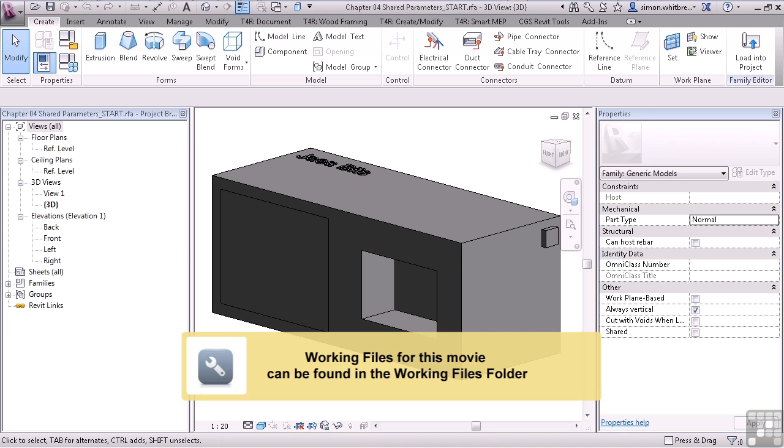Video 0402 Shared Parameters. From your Chapter 4 folder, open up the file Chapter 4 Shared Parameters Start. The first thing that you need to know about shared parameters is that they are stored in a text file. Generally, some sort of manager will have set this up for you, unless you're the manager, of course. Autodesk made a good start with their shared parameter file that's distributed on Seek. And there are also the other standards like ANZRS.

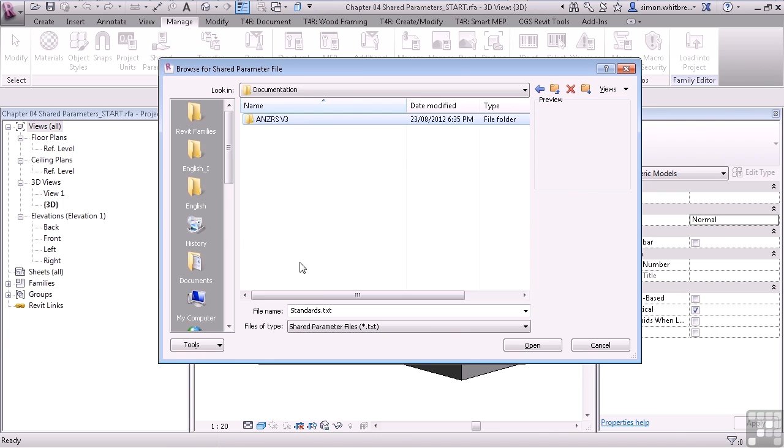To set up or just set your shared parameter file, go to the Manage tab and click on Shared Parameters. Here, if the shared parameter file has not yet been set, you can browse and find your shared parameter file. Here under the Documentation folder, I've included the ANZRS version 3 shared parameters, and I'm going to select the MEP version. In this file you can see that we've got some parameter groups, so I could select mechanical equipment and find some standard shared parameter names.

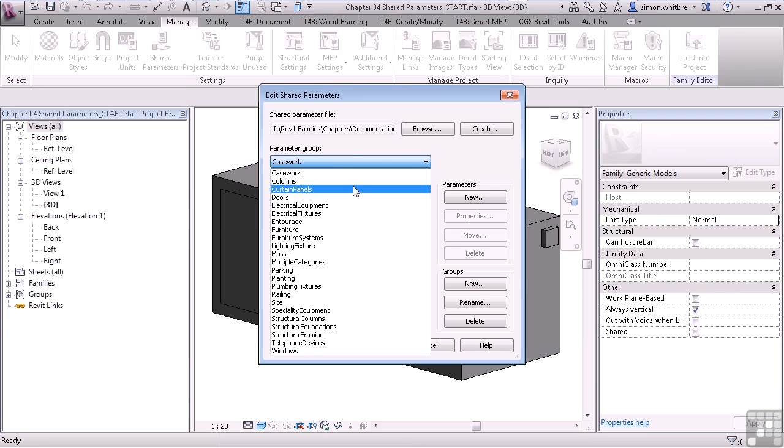I don't have to use this shared parameter file all the time. I can swap them, so if I'm creating an architectural family, I can browse and open up another shared parameter file. Here we've got parameter groups for casework, columns, curtain panels, doors, etc. Let's actually take a look at one of these shared parameter files. You can see the file extension is a TXT file, so we should be able to open this in Notepad. And here's the shared parameter file itself.

There are a few comments at the top. This is a Revit shared parameter file. Well, we know that. The next line is important though. Do not edit manually. If you're tempted to come in here and change names to suit the way you want the name to appear, then it's slapping time. You must not edit this manually. If you want a parameter with another name, then you need to go and create it. There are Revit add-ins, however, that will allow you to do these changes, but they're add-ins that you do have to pay for.

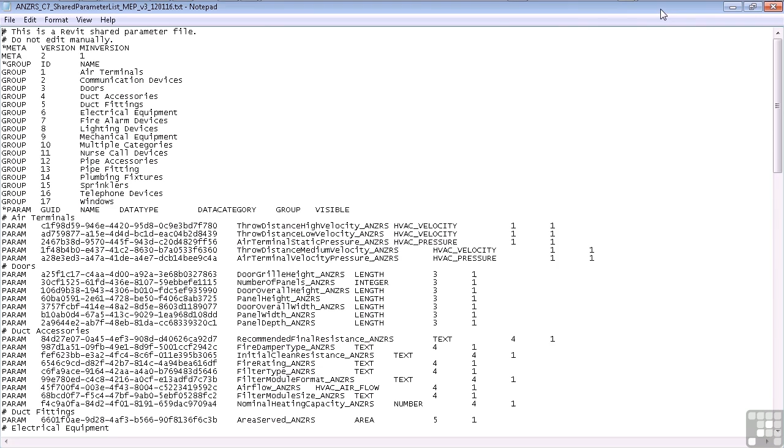As a point of interest, here we have the groups which we can see in the Revit file. Let's put them side by side. I've got a group called Air Terminals, Communication Devices, Doors, etc. So this is the MEP shared parameter file. And under the groups, we have the different parameters. First off, we have this thing called a GUID. This is a unique identifier that Revit generates itself.

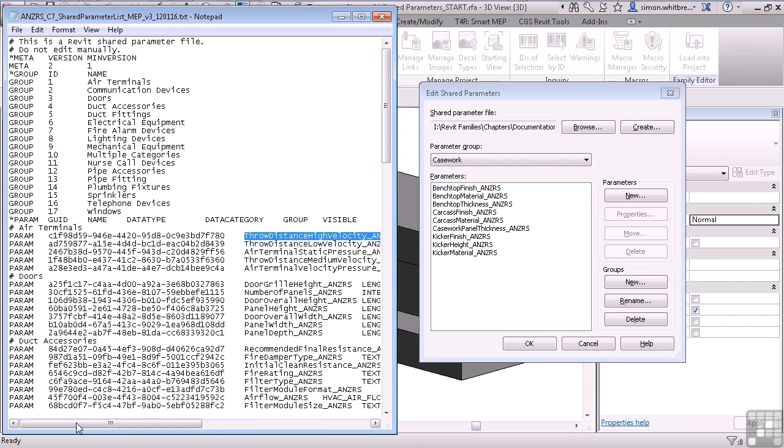Next is the name. There we have the name of the parameter, and then its data type, HVAC velocity. The group that it belongs to. So here's group 1, which was for air terminals. And whether the parameter is visible or not. Just like work sharing, shared parameters need careful planning and management. The people involved with ANZRS have put a considerable amount of time and effort into making sure that these parameters work with designers and industry.

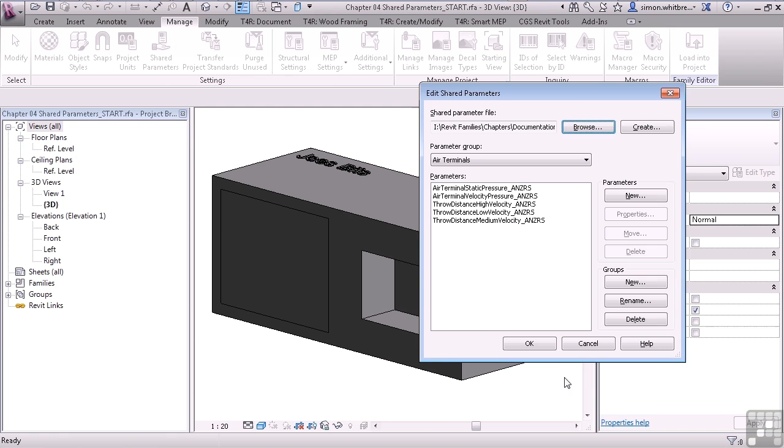So let's swap that shared parameter list back to the MEP one and click on OK. Now, go back to the Create tab, the Family Types dialog box, and we'll add a parameter. This time, we're going to select a shared parameter. Notice how the parameter data is automatically grayed out. So we'll select a parameter, change the parameter group to Mechanical Equipment, and select Equipment Width. Click on OK. Now see how even the name of the parameter is grayed out. I can't change anything. The only thing I can change is where I can group that parameter under.

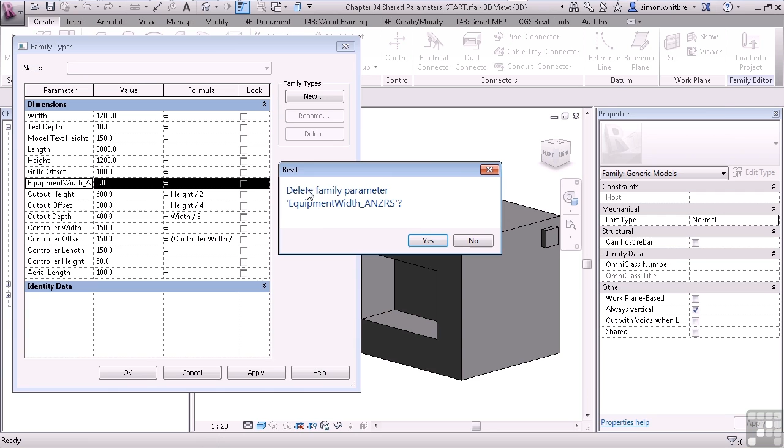Let's click OK, and you can see that we've now added equipment width into our set of parameters. Clicking on Modify only allows me to change the grouping, or whether it's a type or instance. For now I'm going to remove this. And it asks me, do I want to delete that parameter? And I'll say yes. What I want to do finally with this exercise is show you that you can change a family parameter into a shared parameter.

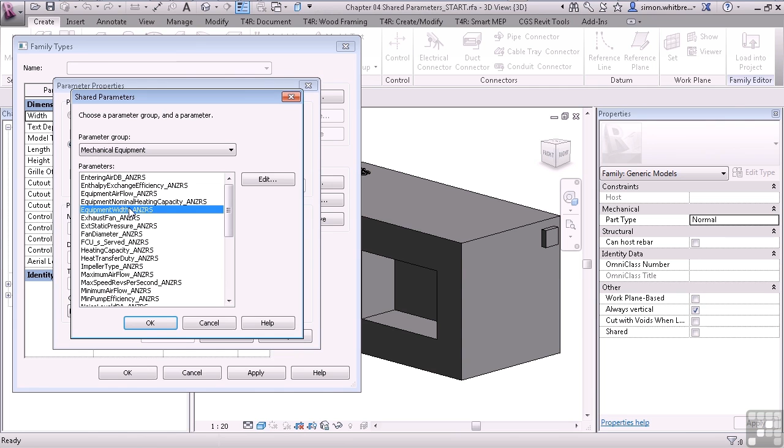So let's select the width, go back to Modify, and select Shared Parameter. Click on Select. We'll go back to the mechanical equipment and we'll select Equipment Width. Click on OK and OK again. The width parameter has now been changed to equipment width. And any formulas that had width in it have also been changed. This means that in the initial stages of design for your family, you could just go through with family parameters. Once you're happy with it, change them to shared parameters and use the standards.